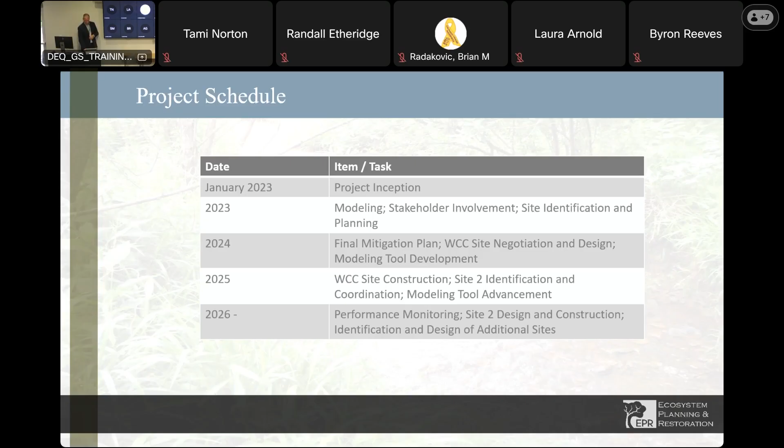So this is a map of the watershed. That red line is the Stoney Creek watershed. You can see it's on the city of Goldsboro there, Wayne County, North Carolina. The upper part of the watershed is still somewhat agricultural, although it's got a lot of development pressure on it, and the lower part of the watershed is the city.

Our first site that we chose to implement is that red star there, kind of right in the middle of the watershed, near Wayne Memorial Drive. You'll hear me talk about that a little bit - that's kind of the main thoroughfare that cuts through the watershed. It's got the hospital, it's got the community college, and it has had flooding problems over the years, and it was specifically cited as a focus area in the legislation that appropriated funding for this project.

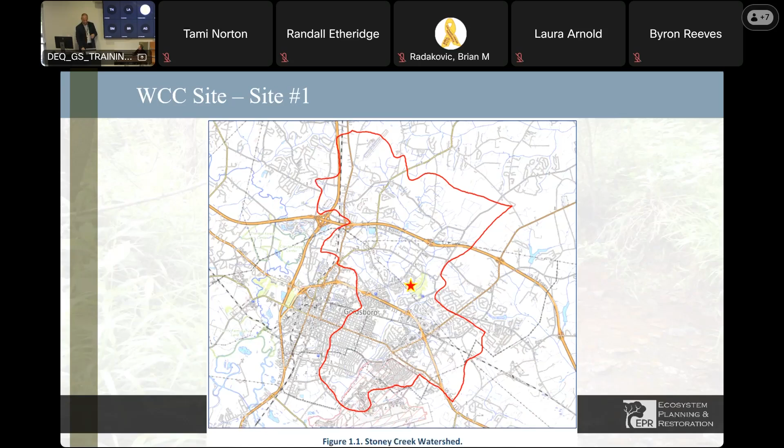Just pulled this graph out of the mitigation plan that we did for the site. This is a stormwater constructed wetland project. I'll show you here in just a second. The whole idea is to capture water that's primarily coming off of the Wayne Community College campus, and take that steep peak, because it's very high impervious surface, knock it off, spread it out, so we retain that water and knock that hydrograph down, so that water going into Reedy Branch and then ultimately into Stoney Creek, hopefully has some impact, benefit downstream on resilience.

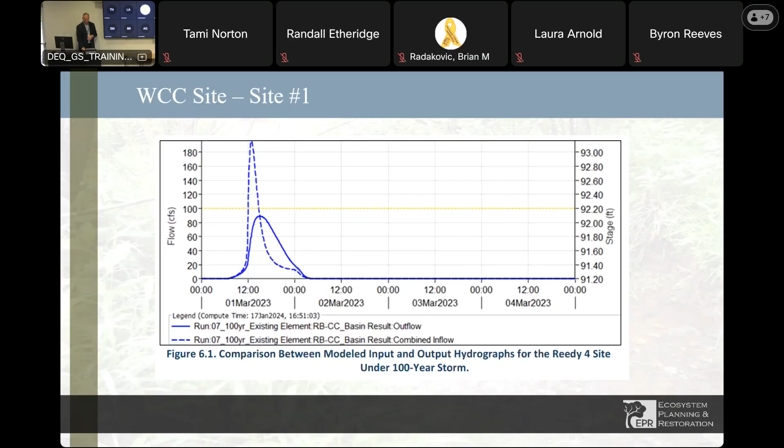Where we are now, earthwork on that structure, that site completed this month. We had a walkthrough with the college last Friday. Everything went great. We've still got planting to do. That'll be done probably the end of November, 1st of December in the dormant season.

We'll start the monitoring setup work probably next week, working on getting that instrumentation. We're going to be monitoring the hydrology of that site. You saw my hydrograph I presented earlier - that was the model prediction of what the site's going to do. We're actually going to implement it with equipment and document what that project is doing, that's our goal. That'll be done for, I think, 5 years is our contract monitoring period. And then we'll have as-built and the baseline monitoring document done in December.

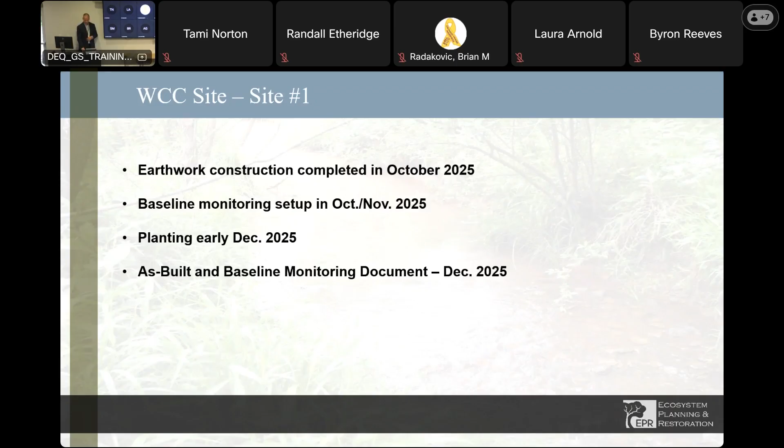Okay, so this is the completed site. I believe it's 9 acres is the catchment area of that stormwater wetland area. You can see the college kind of back there in the upper right.

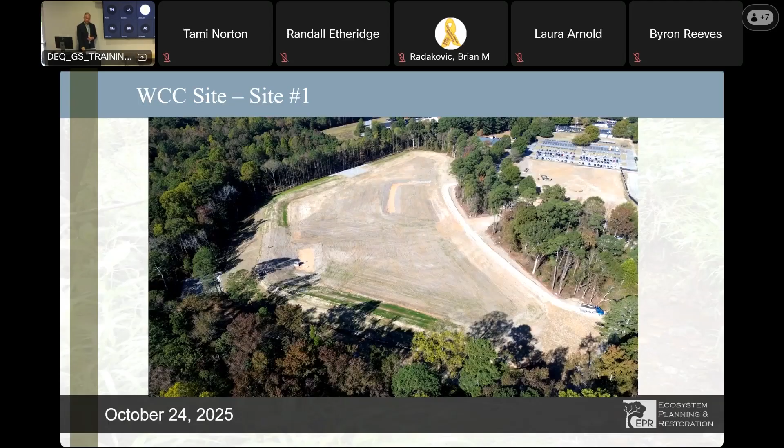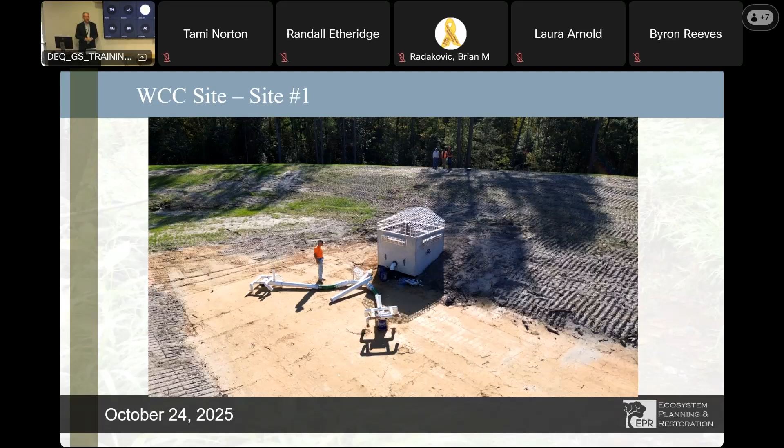That's our primary outlet for the structure, pretty big drop box there with the skimmers that they were attaching on Friday. That will allow water to come into that basin, rise up to the level of the top of that outlet before it starts going out. That'll set the normal high pool, and then those skimmers will draw it down over 2 or 3 days to drop that hydrograph limb that I showed you earlier.

This is looking on the south, southeast side. You can see the embankment of the structure coming around, and behind that in the shadows of the trees, there's a greenway connector. We've got a greenway trail that goes along Reedy Branch, back in the woods, and they've got walking trails on the campus as well. One of the amenities the college really liked about this project, it was going to provide the opportunity to connect those two trails with a greenway connector. So the college is very excited about that, and if you look, you can see that white line back there that they were paving the day we were there on Friday.

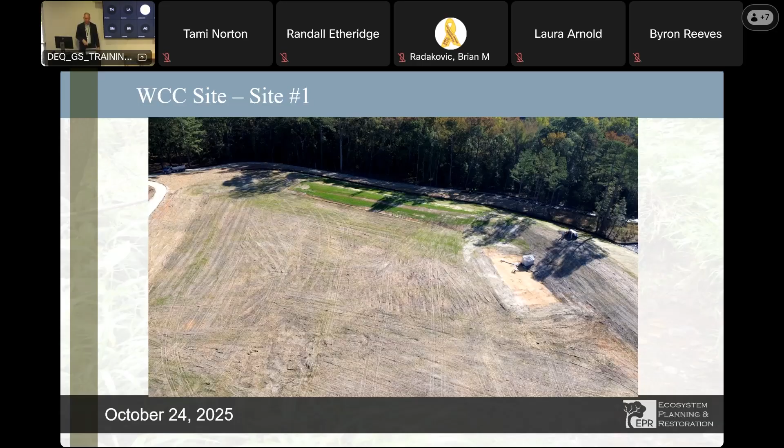In the bottom of that photo, you can see the inlet where the water comes in from the campus. I'll show you a video of that in a minute. It comes into that little stilling basin, fills up, spreads out, and then is controlled by that outlet structure. Curious to see what it looks like after this week.

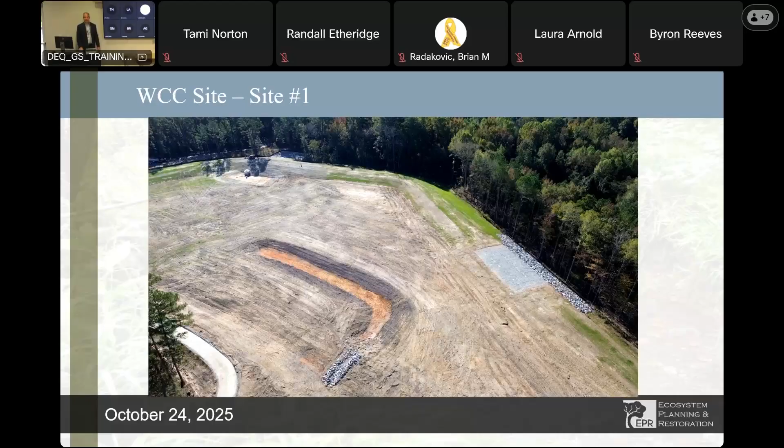Sorry, let me go back one. And then you've got an emergency spillway over there on the right side of that photo. That's some interlocking block that when the water level gets to a certain height, it will release there, like in a big tropical system or something, to keep from breaching over the embankment anywhere else.

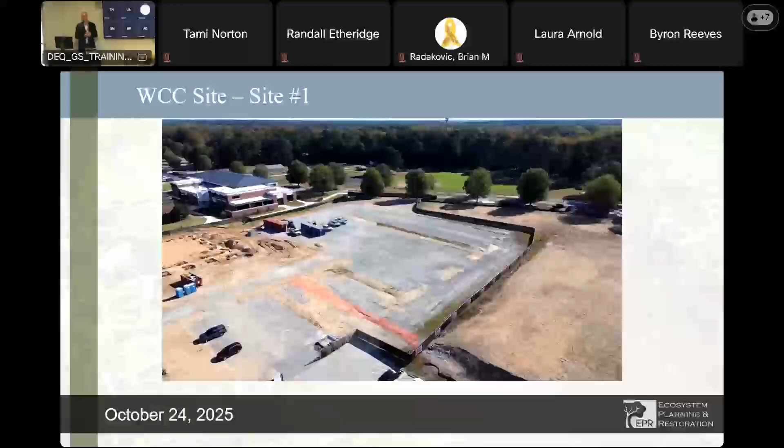See if it's going to work - hey, it works. So that's looking at the college, that's our watershed. That's some current construction going on with some buildings they're adding, additional impervious surface. That area of dirt there is some spoil we brought over from the construction site, and we were able to spoil that on site. You can see the ditch there in the center that drains all of that water to a pipe that goes under the campus drive, and then comes out on the other side into our constructed wetland at that outlet I was showing you earlier.

You can see looking back towards the outlet of the project. So it gives you a good flavor of that. So excited to get that one in the ground. It seemed like a long time coming. There were a lot of pieces to get through with that.

This was the first project done under this pilot project, the first one done for resiliency, so we had to work through things like easement agreements that had to be tailored for this, so that took some going back and forth.

But it's been a good process working with the department. So can I ask you a question? Yeah, sure.

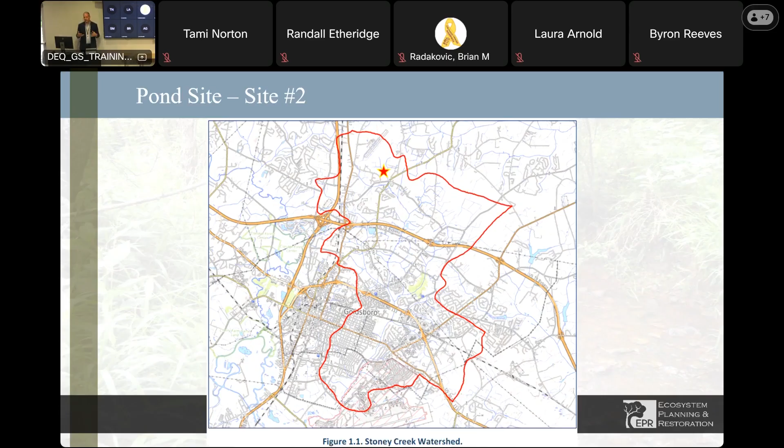Just real quick, the planting you're going to be doing, if I remember correctly, it's going to be some wetland, some not wetland, on the inside perimeter. We don't want to plant the embankment with anything woody. The colleges agreed they're going to maintain that just like you would a dam, because that's essentially what it is. On the interior of the project, we're going to have a combination of herbaceous and woody plantings, mostly wetland plants, but some facultative wetland, obligate wetland, and some up to facultative in the drier areas, because there will be different zones throughout.

Okay, second site is a pond location, an existing pond we identified up in the upper reaches of the watershed, in the headwaters of Stoney. This is a site where we're looking at doing a pond retrofit to increase storage during storm events, and work with the landowners to improve a situation where they're pretty close to a pond breach right now.

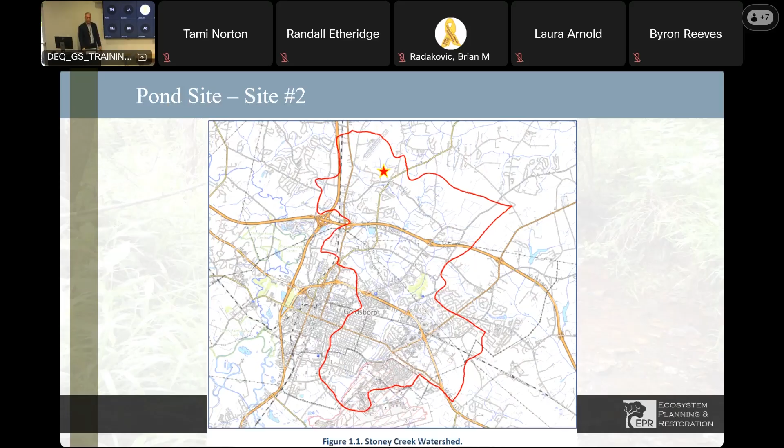So I should say too, with the college, they agreed to do that first site with us, no payment for land or anything like that. There's going to be no payment for land on this site either. That's probably something we'll have to do on some future sites. We've been fortunate with the opportunities we've been given, so we're trying to make that money go as far as possible. But here we've got landowners who will get a benefit out of this because their current pond is about to breach.

Our landowners, we have two primarily. There's one in the upper part too, but they don't really control the dam. All are verbally on board. We've developed preliminary design concepts, done some modeling, and right now we're working with dam safety because the size of the dam could potentially kick us into an intermediate classification, and we're trying to dial things in to hopefully get an exempt status.

If we have to go intermediate, I think we can work with that. We are going to avoid high hazard. I think we've decided, along with DMS, that's probably not where we want to go with these types of projects, at least not with this one. So we're working through that process with dam safety.

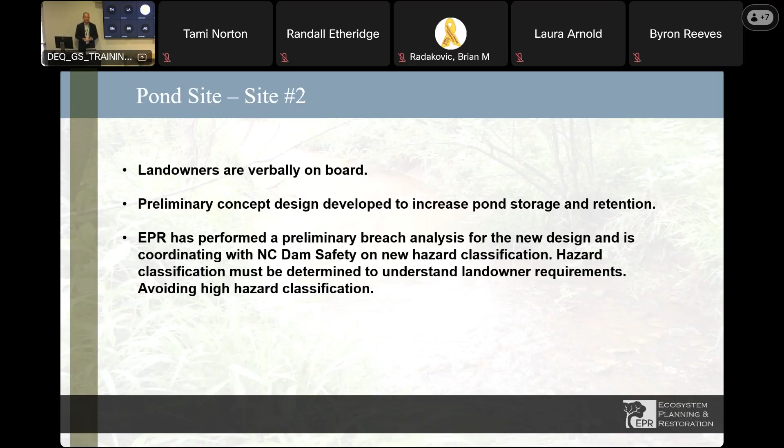Once we understand where we're going to fall, we can communicate any requirements to the landowner, make sure they're on board, get them contracted with agreements, and move forward with the formal design, permit, and implementation of this site.

But probably a few more good storm events and that dam could go. The landowners want to keep that pond. If they're going to keep it, some significant work has to be done. So it opens the opportunity to rebuild that dam correctly at a higher height and allow that pond to have a lot more storage for storm events, holding water higher in the watershed rather than letting it shoot all the way down.

We've got opportunities on the north side to do some excavation for littoral shelves, wetland shelves, that type of thing, which could have water quality benefits as well. That'll help balance some earthwork, so there are good benefits to doing that.

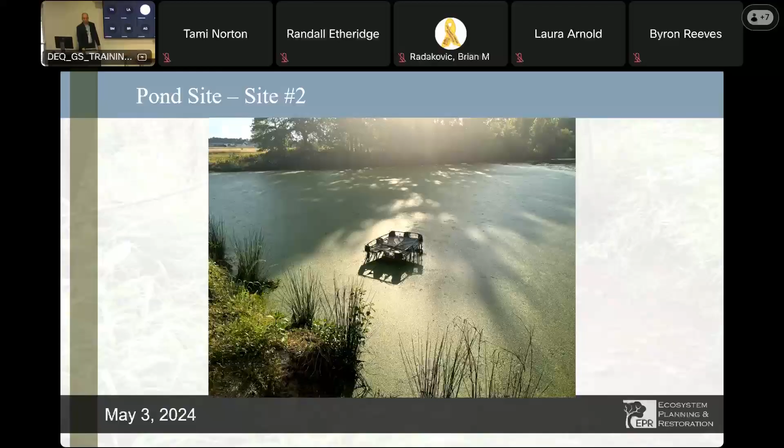Okay, looking forward, we've identified a number of different sites around that have potential for doing additional work. I called these sites headwater sites. So what we focused on so far to date has been projects that are not on jurisdictional streams because of the permitting issues and complications that are going to arise from that.

Going into where we are now, into the next phase of the project, we have some ideas that we're working through of how maybe we could work on jurisdictional streams and work on larger systems, get more retention, get more bang for the buck.

Because what we're seeing is when you're working on these smaller projects up higher in the watershed, once you get down the watershed, the effects are getting drowned out. You're really not getting a whole lot of improvement as you get further and further away from those practices. So we're trying to look at ways we can get bigger bang for the buck.

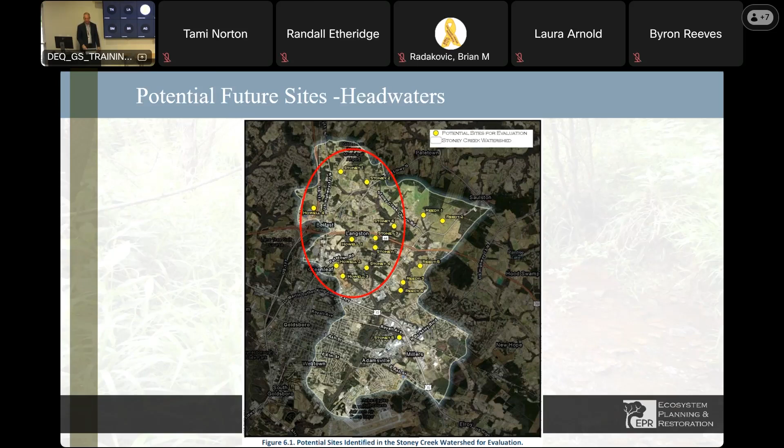This is one concept we're looking at. Without going too deep down a rabbit hole here, Stoney Creek has some interesting topography. So these main stream channels, the larger main stems, have very distinct, very deep valleys. So your agriculture, your development is up on the high terraces, and then they drop down steeply into these floodplains of these creeks, which by and large are wetlands and woody and in pretty good condition.

But it opens up an opportunity there if we can provide retention in those valleys and keep that retention from affecting development, existing structures, future structures, agriculture, that type of thing. Seems like there's a big opportunity there to provide that retention and resilience in those areas if we can figure out some of the technical complications to that.

So one concept we're looking at with modeling is basically think of a road crossing without the road. So building an embankment across that valley, that floodplain, to capture that water, and then have a structure at the bottom that at base flow allows free flow through. So you don't get aquatic organisms that are blocked from moving upstream.

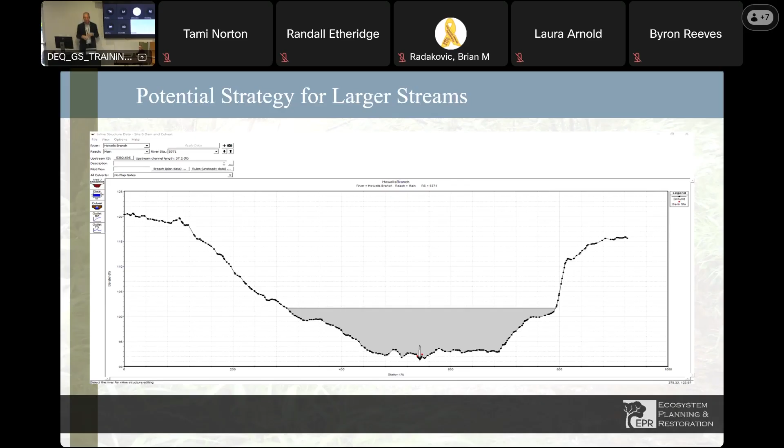You don't get some of those permitting concerns that you have with a reservoir. You would have the impact of that embankment, but ideally the impacts up and downstream would be minimal, if not nonexistent. So that's the concept, a 3D kind of visualization of that we're working on.

Again, running these models to kind of see, okay, how could we do this? Number one, would it be effective? How effective? And number two, how the heck are we going to design that so that it doesn't blow out in the first big storm and is going to be sustainable?

I'm sorry, that white thing, is that actually supposed to be the stream? No, sorry. That's the embankment that's built. Okay, I'm sorry, it was hard to tell. The purple lines there are showing your contours. So the valley is kind of running diagonally across there, that flat area.

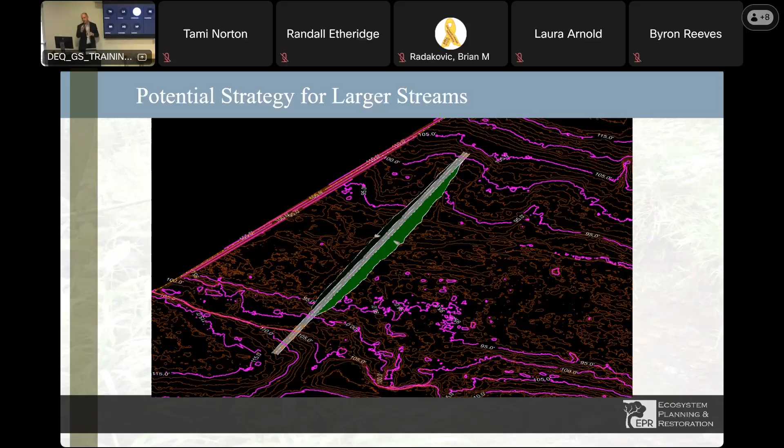Right, and then that's showing that embankment built across there with that little pipe kind of in the middle there that would be on the stream channel. So it's actually not showing. Oh, I see, okay. Yeah, it's quick and dirty. No, that makes sense, thank you.

So we've run a little bit of modeling on that, as I've indicated already. This was a potential location where the topography seemed to lend itself to being able to do that. So this is all conceptual. This is not any kind of agreements or discussion with landowners at this point. This is just looking at technically how would this work and what would the effect be.

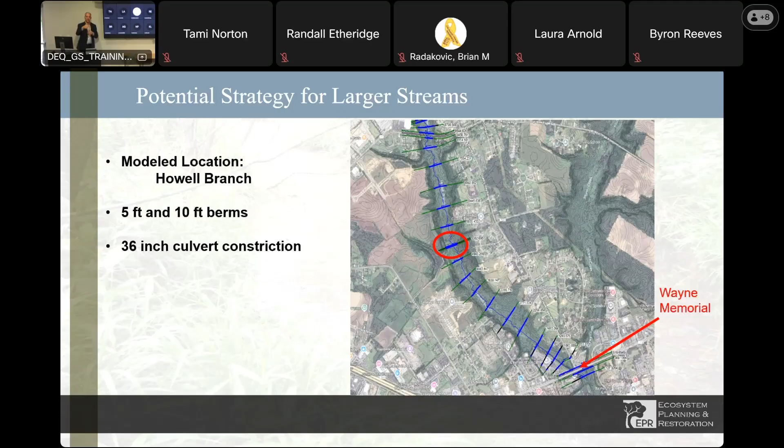So you can see Wayne Memorial Drive down there in the bottom of the slide. If we went maybe a mile upstream or so of that and did that, we looked at different berm heights, different outlet configurations, and what we've kind of seen initially is we can get some pretty good reductions in the smaller size storms.

As we go up to a bigger berm there on the right, a 10-foot type structure embankment, we're getting reductions at Wayne Memorial of more than a foot, up to the 10-year storm, and then that drops off.

Again, we haven't dialed in these numbers yet, but just looking initially at how effective a structure like this might be as compared to doing these more headwater sites that are further removed, and having to do maybe many of those sites to get the same type of effect downstream.

It says peak shifting like this, if it happens at a watershed scale, can have unintended consequences. Have you given thought to the longer period water will sit on non-participating properties downstream of these projects? I think he's thinking about hydrologic trespass, ish. Have we thought about it so far? The answer is probably no, because we're at this conceptual level, but will we have to think about that with any kind of modeling or specific implementation?

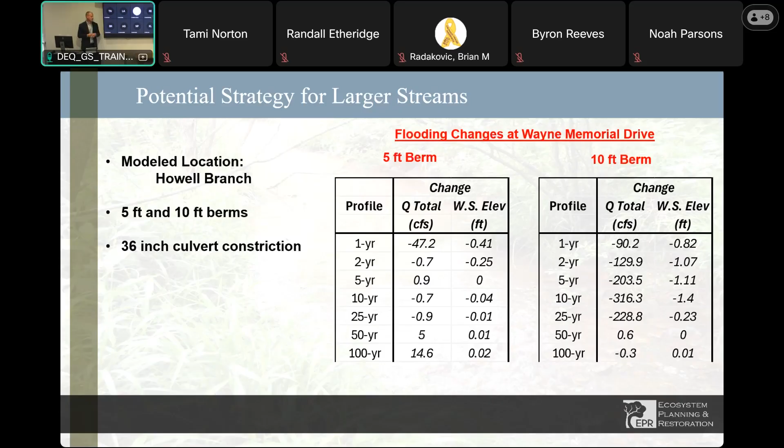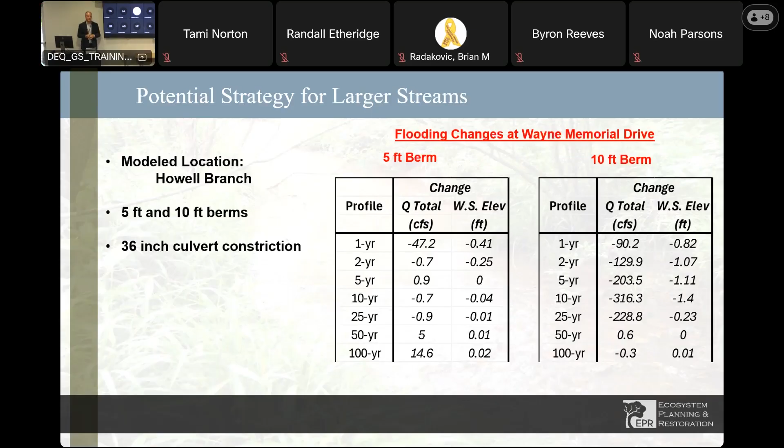So can we come up with some tools that allow us to make these type of evaluations at a preliminary level quicker and easier and prioritize things better without having to do a lot of this modeling work that we basically spent a year or two doing. I'll be a lead in on that.

Yeah, is this the end? That's the end. Oh, good. Oh, here's Tami.

So I think you might have to unplug. Yes, probably do. And then Tami should be able to share. So just real quick before Tami starts, as she's getting her stuff together,

Tami and I especially have been working a lot to not only look at these models, and of course she's been doing the modeling, but to talk about all the implications, what it means, all those kind of things. And where this actually started was because we are going to be using possibly traditional mitigation practices for flood mitigation, those kind of projects, as in wetland, stream, basically nature-based solutions.

We, as DMS, needed to understand what kind of effect those projects currently have on flooding. We needed that information so that when we do start tracking our progress and our storage, and when we start looking at proposals and comparing them, we have some idea. So we, of course, approached EPR, and we asked them to do that.

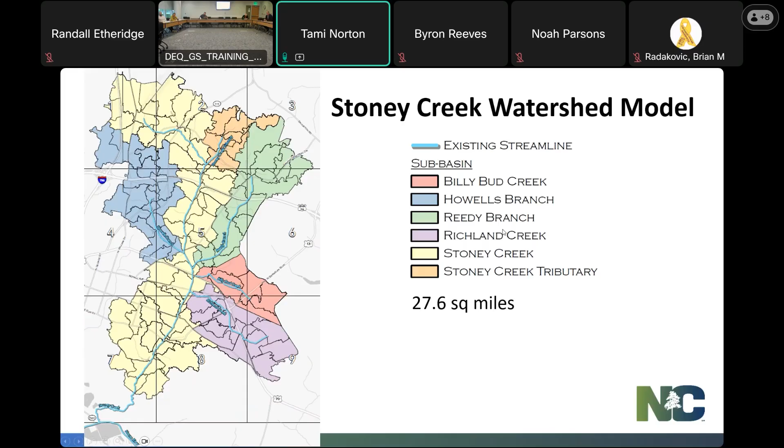Okay. So just a reminder about the Stoney Creek Watershed Model. It's about 28 square miles. There are several sub-watersheds within it, and we did some nature-based solution testing and modeling within the Reedy Branch sub-watershed, which is the green area on the screen. Some of the NBS practice types that we looked at included 3 types of stream restoration, riparian wetland restoration, constructed wetland with various runoff volume captures that we were targeting, and then buffer restoration.

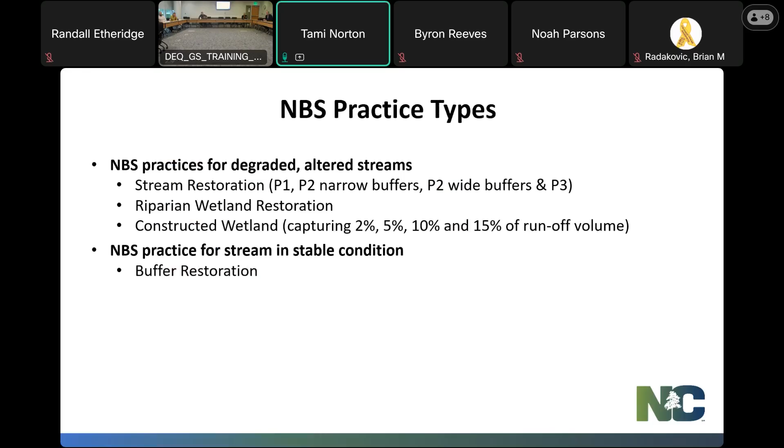And from that modeling, we realized that there was a relationship between the practice area footprint of a project that you were going to implement and the drainage area coming in. This relationship popped out for each of these different types of practices. And from that, we thought, is there a way that we can develop a tool to predict peak flow reduction, which can be translated to a water surface elevation reduction, without doing the detailed modeling, just like Kevin was talking about, for every single site that we want to evaluate.

And so from that previous modeling, we came up with a site-specific tool where you could look at the individual site, see what could be fit in that site, and then look at the percent reduction in peak flow at the outlet of that site, as well as a location downstream of interest: if we put the practice here, what does it do to the flooding downstream at this location?

And then using basically the same equations, we also came up with a preliminary tool to estimate, if we have a target site, for instance Wayne Memorial Drive, and we want to reduce the water surface elevation at that location by half a foot, what kind of peak flow reduction is needed to hit that target? And can we back into how much nature-based solution practice is going to be required upstream of it in order to hit those targets? And so that's where we were. I presented on those preliminary tools last time.

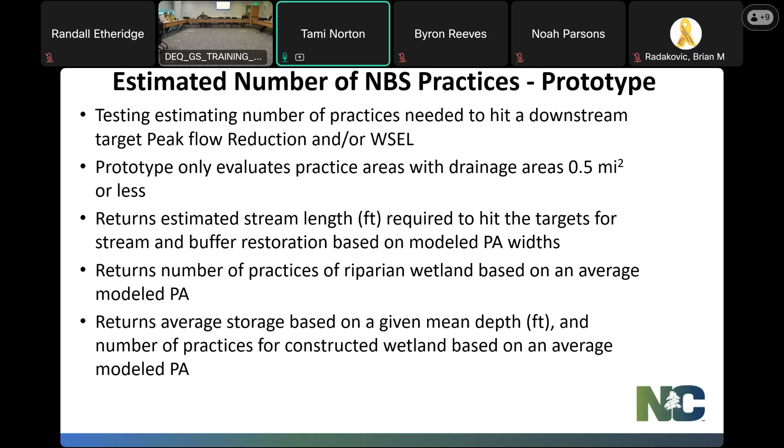I think I showed some of these at our presentation at the conference, something similar to this. Essentially, a couple of things you need to run this part of the tool: you need to know the drainage area where you're going to put a project—the maximum drainage area of the practice site. In this case, I put in a half a square mile, that's the max. You also need to know the drainage area of the site downstream of your practice. In this case, this site has a drainage area downstream of the practice of 4 square miles.

It runs through the equations to spit out the total number of acres required of each kind of NBS practice for the targets you selected at that downstream site. In this case, we're looking at a reduction of half a foot through 1.25 feet. So what does that mean? To get this half a foot reduction, we need a reduction of 22.5% in peak flow at this site. Backing into it, that means we need to take the 100-year flow down to about a 52-year flow to get a half a foot reduction. For a target, what volume do we need to capture to get that reduction? That's what these numbers mean.

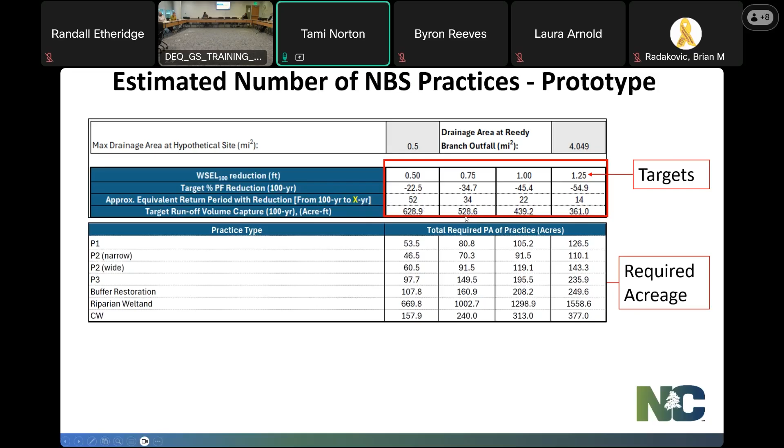There's some upfront hydraulics and estimating you need to do at your site. I used existing HEC-RAS models at the location to determine and estimate these numbers.

The second thing it does is not only give you the footprint acreage you would need, but it also lets you play with the dimensions of your practice footprint. You can adjust the width of the stream restoration and buffer restoration footprints, and it will tell you—if you have a 200-foot wide corridor, you'll need approximately 11,643 linear feet of priority 1 stream restoration to hit a half a foot reduction in water surface elevation at the downstream target location.

For riparian wetland, you plug in an acreage and it spits out how many practices of that size you would need to hit these targets. In this case, I plugged in 43 acres, and we would need 16 sites of 43-acre riparian wetlands to hit this half a foot target.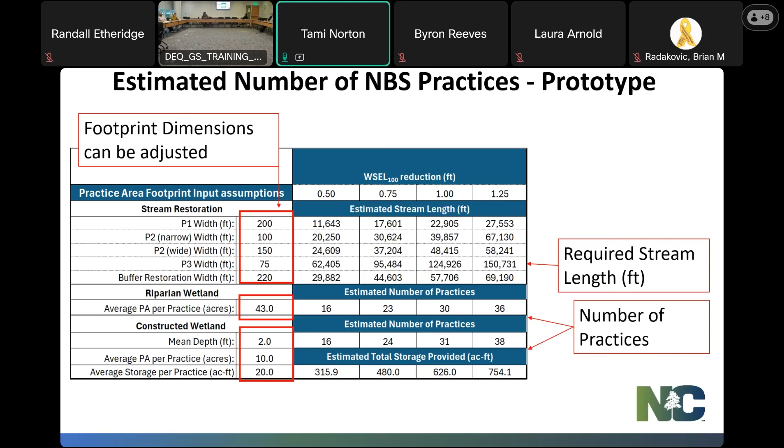Same thing for constructed wetlands—you can adjust the depth and the average footprint in acres of your site, and it estimates the storage and how many practices of that size would be required to hit these targets. So that's where we were when I last presented, this level of sophistication in the tool.

Since then, we've been looking at how we can consider multiple types, not just one, and whether our tool predicts well enough for planning purposes to use instead of modeling all the different scenarios we might want to look at. So we completed additional modeling to evaluate whether the trends are linear or not, and we did multiple practice combinations and compared those with the tool predictions.

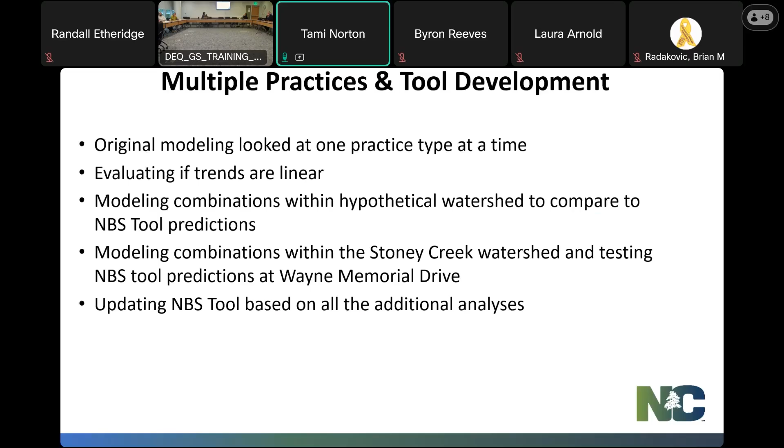We did a couple of different variations of modeling: some in our hypothetical Reedy Branch watershed, but also some in the Stoney Creek real watershed, to see how well the tool predicted outside of the hypothetical situation.

I just want to show you what I mean by that. Reedy Branch was our hypothetical NBS watershed where we did all of our modeling. We wanted to see, okay, what if we did a couple of different practices in a couple of different subbasins? Will our tool predict well compared to the model?

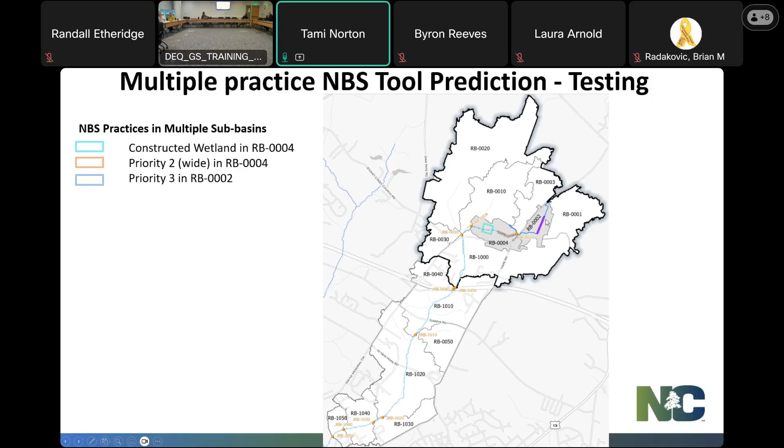So we modeled, in this case, a constructed wetland here, a priority 2 stream restoration here, and then a priority 3 further up in the watershed here. This is a graphical representation of the results. Some people like graphs, some people like tables, so I have a table for table people.

For priority 3, which was the first practice, the most upstream practice, the tool predicted a reduction in peak flow of 7.9%, whereas the model actually predicted a larger reduction than the tool. Further down in the watershed, we have the constructed wetland in priority 2, and the tool predicted about 14%, and the modeling predicted about 12. So they're pretty close.

As you move downstream from the practices, we're looking at the different junctions in the model to see, at this location, how well the tool is predicting versus the model. And it did pretty good in the hypothetical watershed.

If you want to see this, this is the same data but in a table format. Here we are upstream in the most upstream subbasin where our priority 3 was located. The tool predicted a 7.1 CFS change, which is equivalent to about an 8% reduction, versus the model predicted 30 CFS and 34%. So there was quite a difference, the tool under predicted for priority 3 at this location.

But as you move down and look at when we bring in the constructed wetland and the priority 2, along with the priority 3, we start getting these numbers converging and not being as different. The tool actually predicted really well compared to the modeling from that point down.

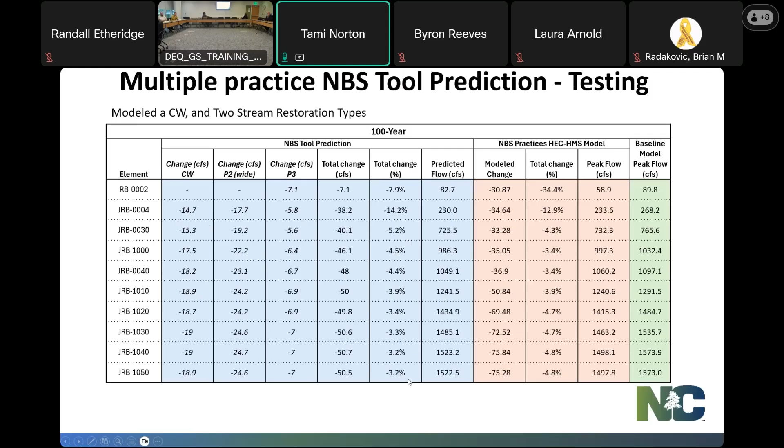So that's great. Let's see how it does in the Stoney Creek watershed itself. What we did is we modeled a priority 3 in... sorry, I don't know why that's showing, I don't know if y'all can see that. I'm trying to get rid of this. I don't know what that is.

We modeled a priority 3 up in the Howells Branch subwatershed here. Just for reference, Wayne Memorial Drive is right here. So we put in a priority 3 project here. We put in a priority 2 stream restoration further upstream in the Stoney Creek watershed. And then we modeled a constructed wetland down a little bit closer to Wayne Memorial Drive in this subbasin here.

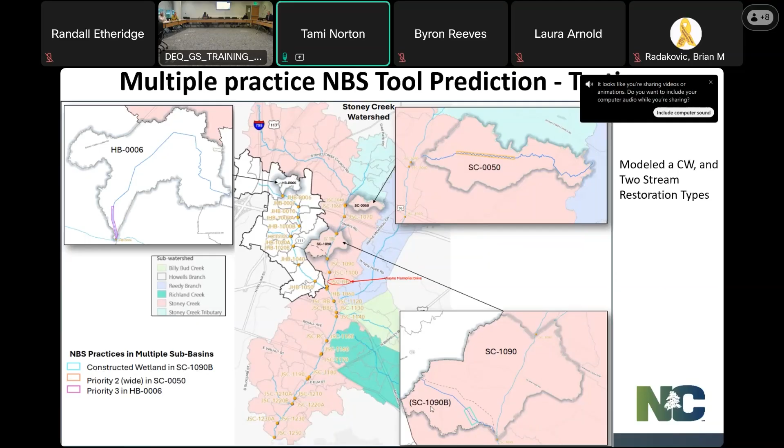And those results are here. So the priority 3, again, under predicted compared to the model way up in the upper watershed of Howells Branch. But I want you to just note the magnitude of flows that we're talking about as well, and then when we get to the table, you'll see that even better.

As you move downstream, the numbers aren't as different, they're pretty close in terms of statistical predicting between the tool and the HMS model. And then here's our priority 2 - it over predicted compared to the modeling in this case. And then the constructed wetland was pretty right on with its prediction with the tool versus the model.

And then here's Wayne Memorial Drive, and our tool, adding up all of the reduction benefits from all 3 of these, is predicting basically no change at Wayne Memorial, but negative 2.6. And then the actual HMS model shows a slight increase, but for modeling, it's basically 0. And that trend is the same all the way down the basin to the outlet.

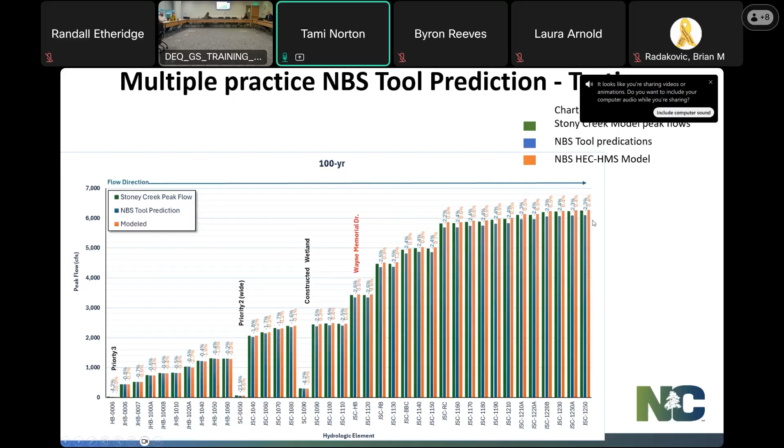So going to the table version of the results, it's showing the same thing. Up here where the priority 3 is located, our existing flow for Stoney Creek is only 26 CFS to begin with. So the tool predicted a 1 CFS change, whereas the model predicted 3. So 4.2 versus 10.9 isn't as far off as it sounds when you have magnitudes this low of flow.

Anyway, you can read, maybe you can't, maybe you can read some of these values as you go on down. This is where the priority 2, the tool predicted a 17 CFS reduction, whereas the model only predicted 6. Again, the flow at that location was only 72 CFS to begin with.

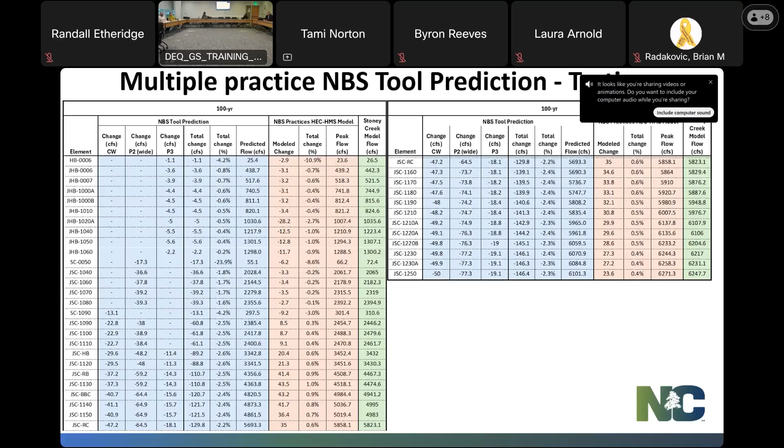And that is where we're at so far. We are getting ready to start some more. We feel like we need to do a lot more testing before we say yes, our tool's great, or it's not great. So what we're getting ready to do is some more modeling within Stony Creek watershed. We're going to look at 30 sites that will include multiple practice types, model them, see what our tool is predicting, and then assess whether it's predicting well, and if not, whether there's anything we can do to improve the tool.

And then one other thing that we're going to do is look at a site outside of Stony Creek watershed and do basically the same thing: model a practice type and use the tool to predict what it would be versus the actual modeling results, to see how well it does outside of Stony Creek. One of the assumptions is that we're going to pick a watershed that is similar to Stony Creek in terms of hydrogeography. We wouldn't want to try to use this in a mountainous situation, for instance. I don't think these values would do well at all there. So that is where we are to date.

That is all I have. So if anybody has any questions... I still don't know how to get rid of that, so I'm just going to leave it. And I cannot see if anybody has questions.

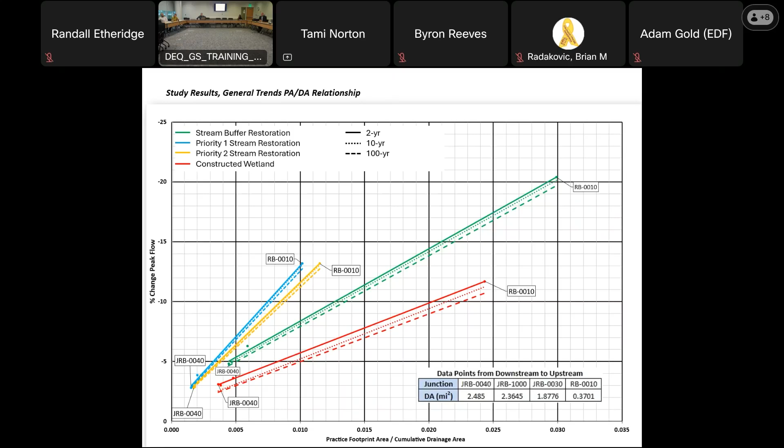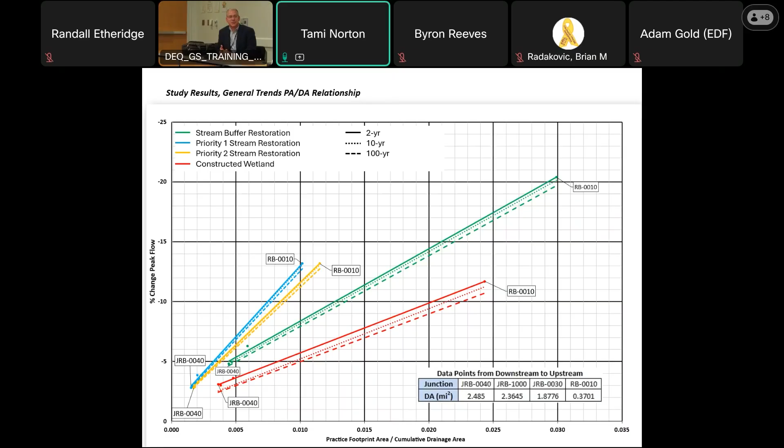I think one thing that's probably evident to everybody on this call, but one obvious conclusion out of all of this is we're not going to undo 200 years of land development with one or two practices going into a watershed. I think that's quite obvious, but what we're trying to do now is quantify what that looks like if we do want to undo some amount of that harm, reduce that flooding. And then we could go down a rabbit hole with the continued development that's going on in a lot of these watersheds too.

Yeah, that's a really good point. I think that was one of the things, even before everything started, we were all having those conversations. And that was one of the goals of the modeling, at least for the program, was to set up realistic expectations. I think that's what this is giving us.

I think another conclusion is there's no magic bullet. There's a lot of tools in the toolbox, and it's going to take a lot of those tools being implemented, along with some things that were not in the scope of our project, like infrastructure improvements and stormwater ordinance changes, or rule changes. Yes, absolutely.

Any more questions before we move on to Celso? All good? Okay, thank you, Tami. No worries, thanks. Yeah, apparently you can just do what you need. Yep, you know what you're doing. I hope so. Let's see.

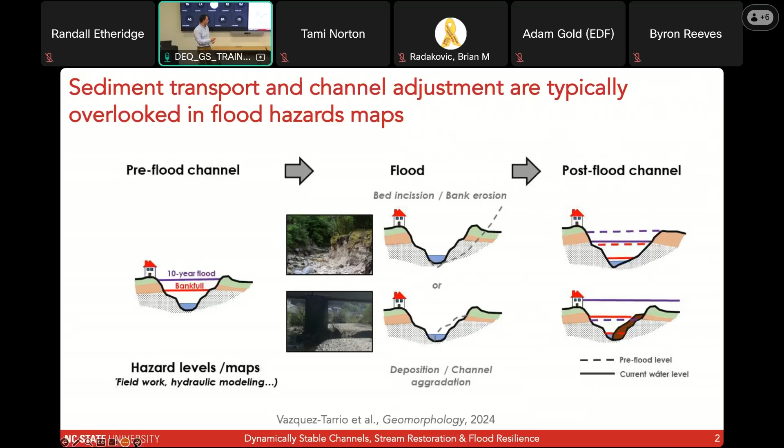So basically it will change how much water and how much sediment a particular river can move under a particular circumstance. So with this in mind, what we set up with this project is to address two specific challenges.

The first challenge is how to make restoration more resilient against floods. And then the second challenge is how to implement river restoration in a future that is unlike the past.

Here are two pictures. The one on the top is the same Swannanoa River, but upstream close to Swannanoa. And this river looks at this location completely different to how it looks close to Asheville.

We were on the tour with Rankin, who's actually doing consulting work for NCDOT, and we all agree that this is what at least a resilient system should look like when moving and transporting sediment. The picture on the bottom is actually from Cross Creek at Fayetteville during Tropical Storm Debby.

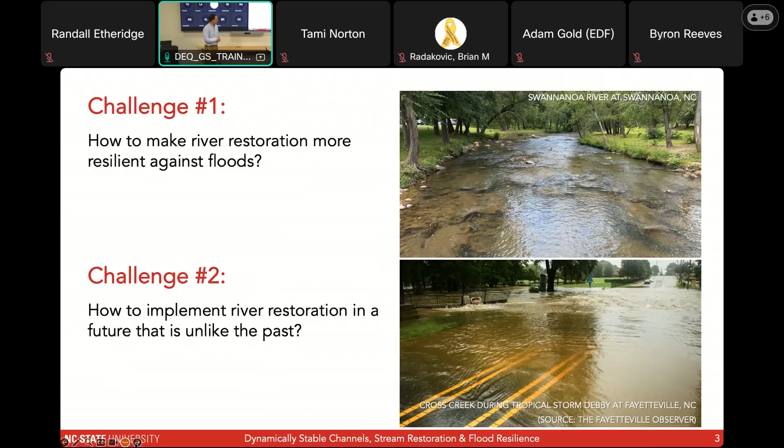We're reaching out to the city of Fayetteville, and I'm going to put Byron on the spot. I reached out to him because we're trying to also target one of the sites close to the coastal plains.

I'll walk you through the two challenges very quickly to highlight a little bit more the motivation of what we're doing, and then I'll move on into what we're specifically doing in this project.

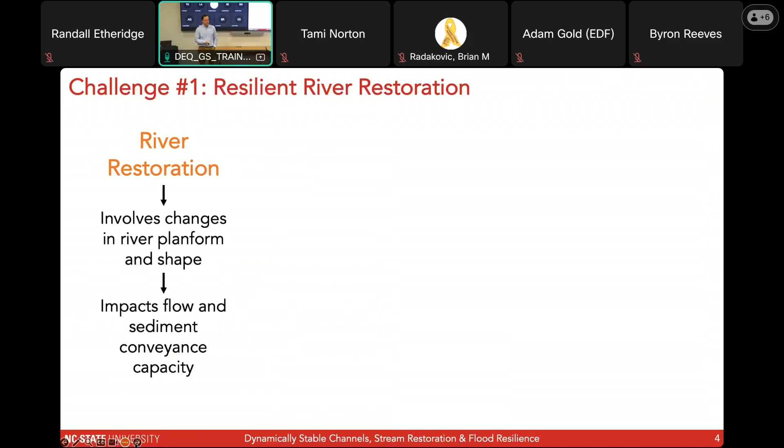As all of you in this room know, river restoration involves changes in river planform shape. That means you are going to have impacts on the sediment transport capacity and the flow conveyance capacity. So you will undoubtedly affect how much sediment and how much water can be moved.

I'm going to show you the case of Richland Creek in Wake Forest, North Carolina. I'm not going to go into the specifics of the restoration design, but this is part of that first interaction that I had with DMS and Perian back in 2018. We started working together.

Beyond the specifics of what we're looking at in this project, what I want you to know is that we had the opportunity to measure two different geometries, and we also had the design.

So we have an opportunity to evaluate the impact of a large event that happened between what we call the post-restoration geometry, about 8 years after the restoration began, and then what we call a post-hurricane geometry 3 months afterwards, after Hurricanes Florence and Michael.

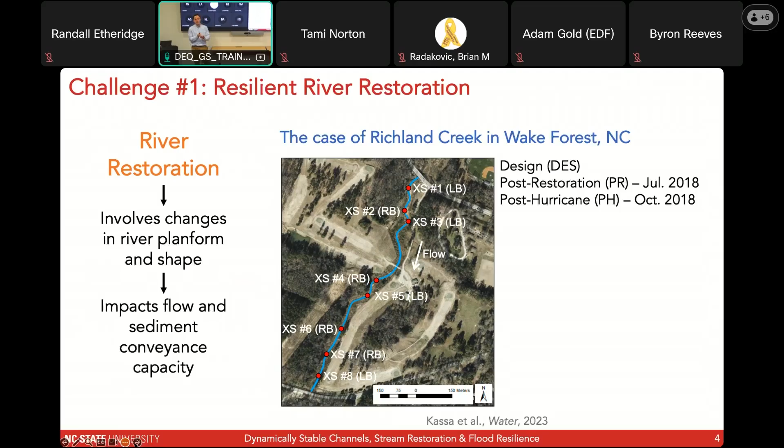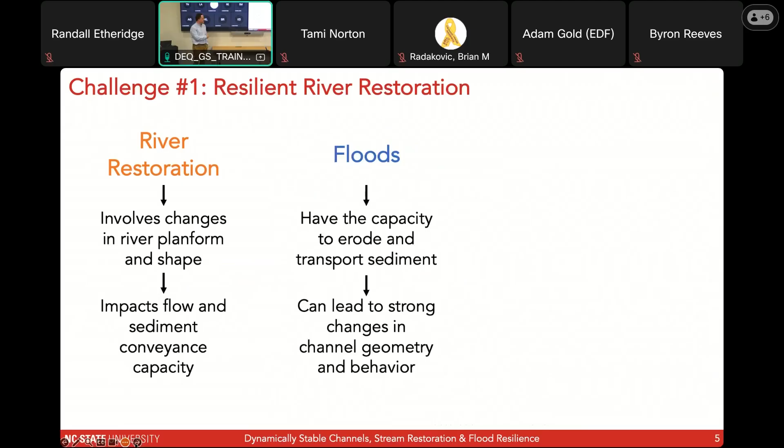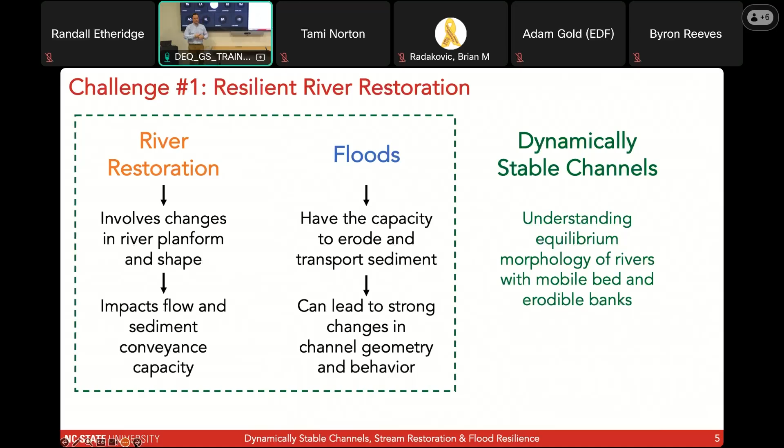So as I illustrate with this example, floods have the capacity to erode sediment and transport sediment, and then can lead to strong changes in channel geometry and behavior. And what we want to do is take these 2 factors into account and then tap into a topic that is old in geomorphology, which is the topic of dynamically stable channels. So it's basically understanding what is that equilibrium shape of a river that is actually actively transporting sediment and that can erode the banks, which is what we see in reality, moving beyond these concepts of threshold channels or channels that will not move under any conditions.

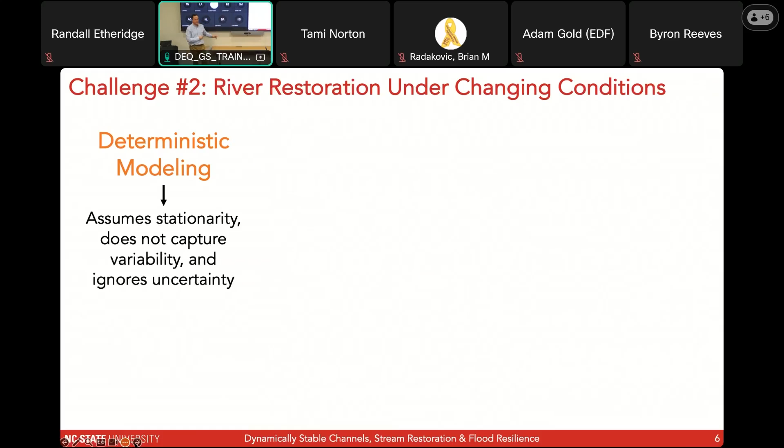All right, and then the second challenge is river restoration under changing conditions. Right? So how do we account for the variability that we expect to see in the future? So typically we apply deterministic models, and what I'm referring to is just the fact that we tend to do modeling in the sense that we have one input, one output, and then that's the value that we take for assessment or for design. And what happens with deterministic modeling is that it typically assumes stationarity, and it tends not to capture the variability and the uncertainty of future events.

And for that, I'm going to show you the case of riverbank erodibility parameters, also building on that work that we pursue with Brian since we started and collaborated. And what you see on the screen is the only equation that I have in the presentation, but this is the excess shear stress equation, and it's what models like BSTEM from USDA and HEC-RAS use for predicting bank erosion. And what the equation does is basically calculate a difference between the applied force and the resisting force, and then based on that, it calculates an erosion rate over a given time.

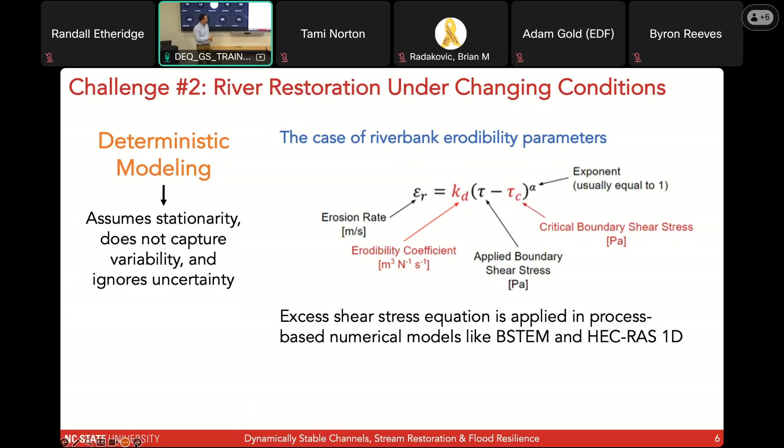And in particular, I want you to focus on the 2 red parameters, the critical boundary shear stress to your right. That's the maximum force that we can have in the channel before erosion starts. And then the erodibility coefficient is most related to the rate. So once sediments start moving, then how fast it will move as the flow continues to increase.

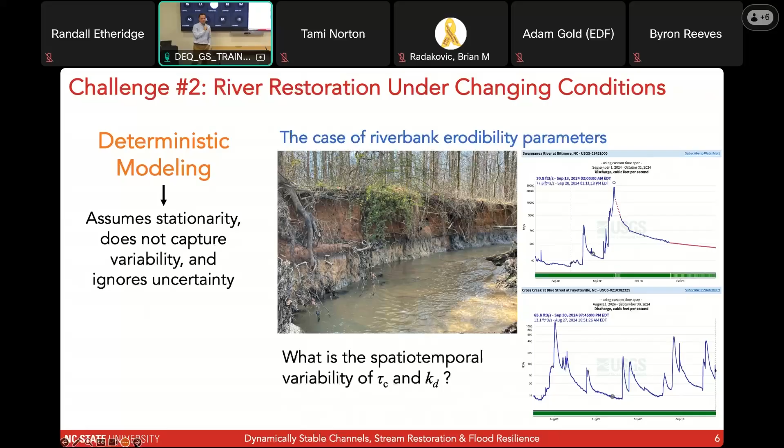So if you have a long dry period and then you have a big storm, the bank will behave differently than if you have subsequent events that may not be a tropical storm Helene level, but you may have significant erosion just driven by small events that happen very frequently. And this is something that right now we are not able to account for in mainstream models.

So the argument here is that we need non-deterministic modeling, and by this what I mean is that we need predictions that are probabilistic, so talking about exceedance rates or probabilities of exceedance. And for that, we're focusing on a performance-based approach. And the idea here is not that we are developing a new model, but it's how we're using current models that work into understanding how we can treat rivers as dynamic entities. So under all possible considerations, what will be the probability of observing a particular event?

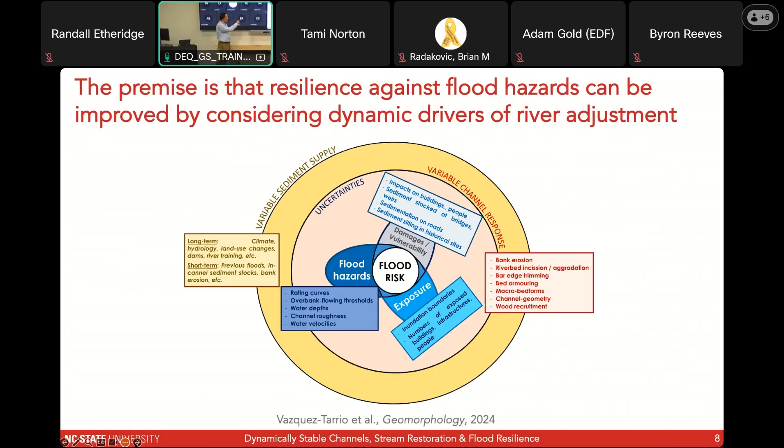So with that in mind, the premise of this work is that resiliency against flood hazards can actually be improved by considering a dynamic adjustment of river channels. And this is a figure from the same paper that I mentioned. And you can see here that there are many things that we are not accounting for in this project, but there are many things that we are, right? Especially related with sediment. And you can see long-term drivers like climate, hydrology and land use transformation, but you can also see some of the short-term factors that we discussed, such as previous flood, in-channel sediment, or bank erosion, among others.

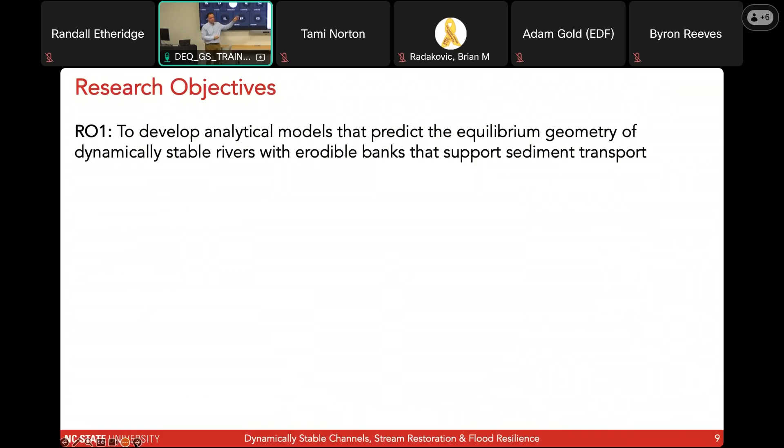So with that, we're going to be pursuing 3 research objectives over the next 3 years. The first one is the more theoretically based objective, which is to develop analytical models for the equilibrium shape of channels that can move sediment and that can erode their banks. The second one is to determine the impact of varying water discharges and sediment loads on that trajectory of adjustment. So what is that interaction between material and water flow? And then the third one will be to incorporate these two into a performance-based approach that can help us to quantify flood risk in a probabilistic sense.

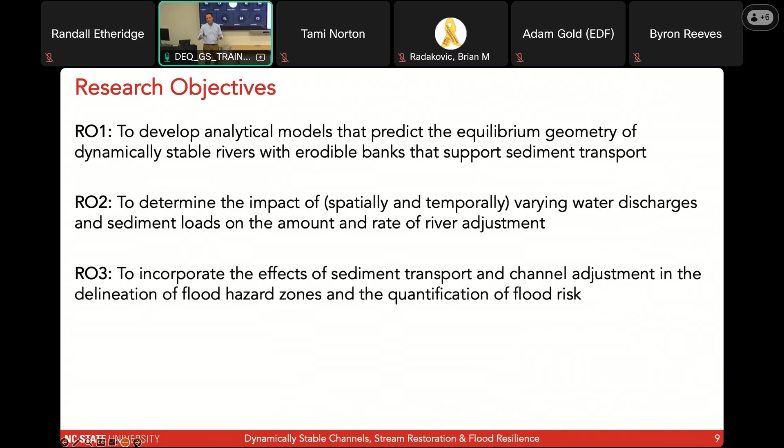So I'm going to walk you very briefly through the motivation behind the 3 research questions, and then I'll conclude with how these 3 things are connected, at least in our minds now, and then when you invite me back again, I'll show you how they are connected in reality, and then see how far off I was.

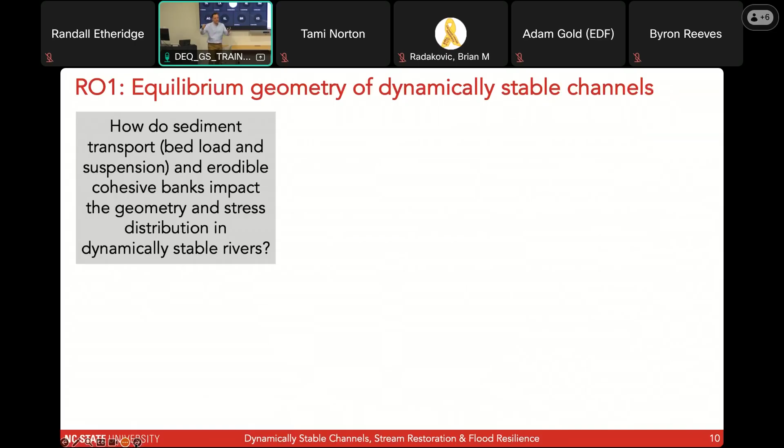So research objective 1, again, has to do with the equilibrium geometry of dynamically stable channels. And again, this is a problem that is old in geomorphology, but we are interested in knowing what a channel will look like depending on the flow regime that is coming into the channel and depending on the material that you have. So whether you have sand or gravel and so forth. So we're interested in understanding all of these different movements that are basically controlling the rate of channel adjustment and the rate of applied force.

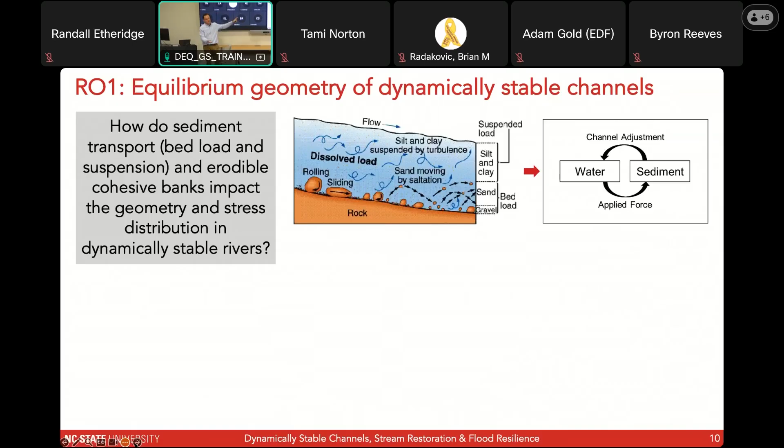You can find sand on the floodplains, and even under those very low conditions, sand was still moving, and you have bedforms that are basically controlling the roughness, right? And the idea here is to highlight that, as Priya mentioned at the beginning, sand will always be moving. So trying to get to the geometry of dynamic channels without considering sediment movement is actually a problem for some of these systems. And then how these interactions are extrapolated when you have more important flow events will control how these channels will continually adjust.

So the idea is that with this research objective in particular, we're going to arrive at design equations that account for these dynamic factors, right? So this will be, in theory, how the channel should look if the channel is made out of certain materials under a certain flow rate.

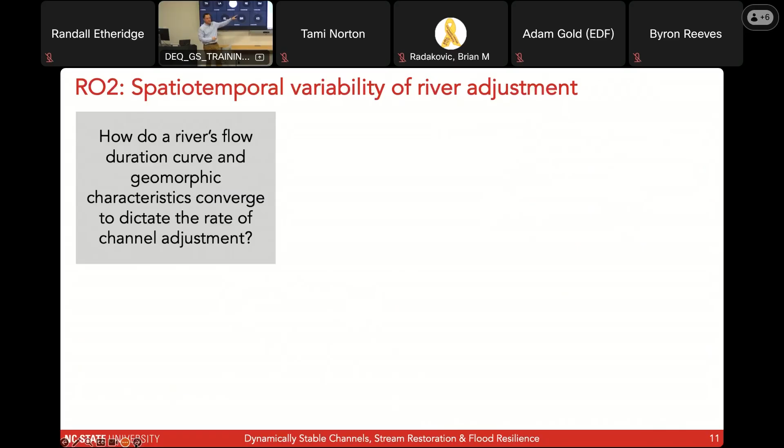The second objective, and this is more a numerical and field work oriented objective, is to look at the spatiotemporal variability of river adjustment. And here, basically, what we want to understand is what happens if you have different characteristics of river channels, right? And here I'm showing you 3 examples from different projects.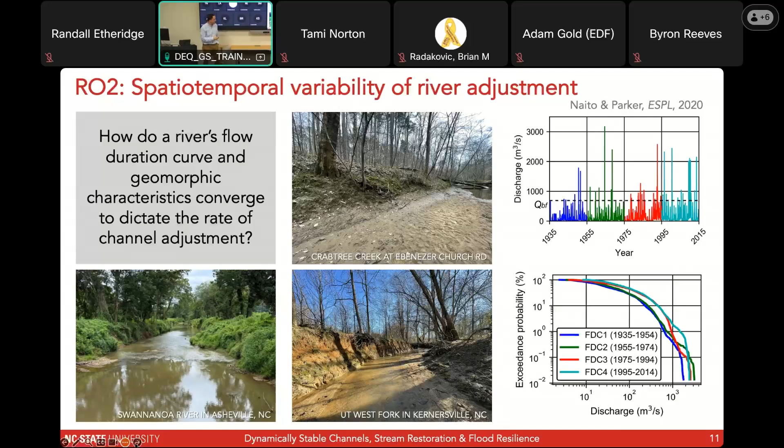And then you combine this with the flow duration curve, and this is just a representation of the time that a particular flow spends in the channel. The 2 figures that I have right here are from a paper that was published in 2020, and this is the Minnesota River. The reason why they are able to do this is because they have a long record of flow discharges in the Minnesota. But what I want you to see on the bottom right corner is how the probability of exceedance has changed over time, right? So flows that are larger are much more frequent now, or they have a higher probability of being exceeded in a particular year, as we have seen even here in this area recently.

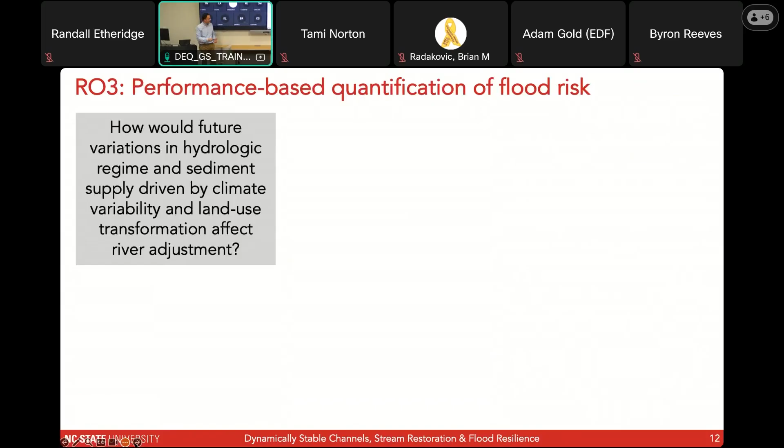So for the third objective, the idea is to take the theoretical approach for the design equations, combine that with what is actually happening in the field at the sites that we select, and then use different scenarios that consider variability in climate and land use transformation, for example, sediment supply, and then understand what will be the most likely trajectory of the river if this were to happen, right?

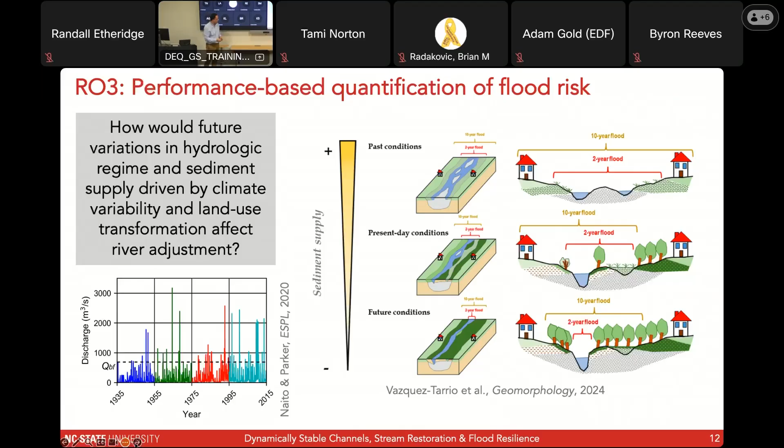We talk about the Swannanoa. Helene was an event that was significant, that primarily caused that river to widen and to move plenty of sediment. And that river will have, because of that event, a different trajectory of adjustment than I would expect to happen, for example, in the coast or in Crabtree or in any other river that we have worked on. So this is more about looking forward in the future.

So coming back to the 3 questions, what we expect to achieve at the end is to combine design equations that can be used separately for stream restoration with river adjustment duration curves that basically allow you, similar to what we do with bank erosion, to understand what will be the trajectory of adjustment of this particular river, given these conditions in the flow and this material. And then those 2 objectives will contribute towards more of the probabilistic approach. Like if we set a series of scenarios inside this probabilistic engine, then what is the probability of exceedance of certain events in the future?

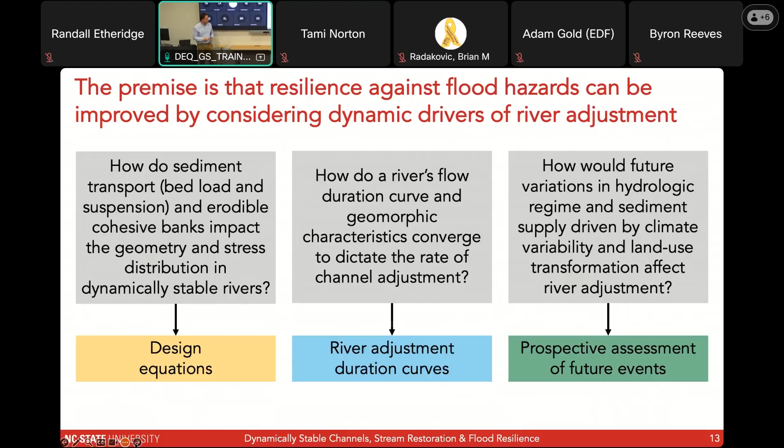And this is a section where the banks are vegetated. You could see a little bit of erosion in the toes. And then it was paved with sand, but we do not expect that to be the case once we determine the material underneath.

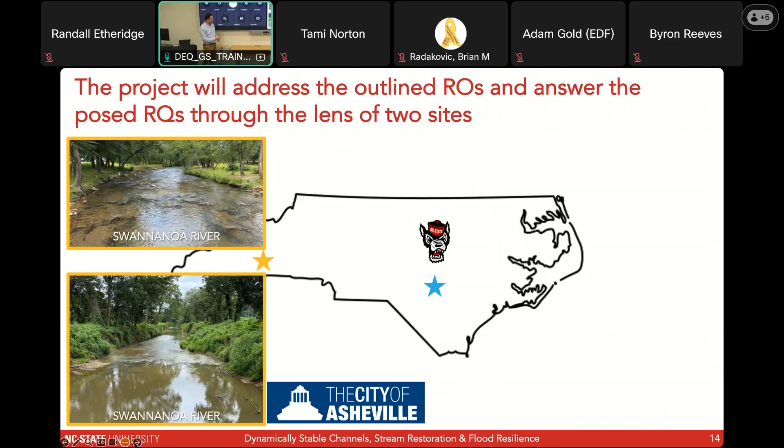And then the second site, we're hoping it will be located within the city of Fayetteville. We're actively trying to select a site. The idea is that with these two selections, we're going to capture conditions that are very different: mountain streams that are steeper and coarser in their material, with streams at the coast that are more frequently subjected to large events and that are likely going to be finer and move differently.

So at these sites, we're going to start conducting field measurements by the end of the year, and these are going to be repeated measurements. We're going to be characterizing channel cross-section, streambank erodibility, installing a fiber optic distributed temperature sensing device that will allow us to understand not only the elevations in the channel bed, but the material gradation towards the bottom, and conducting measurements of flow velocity with an ADCP.

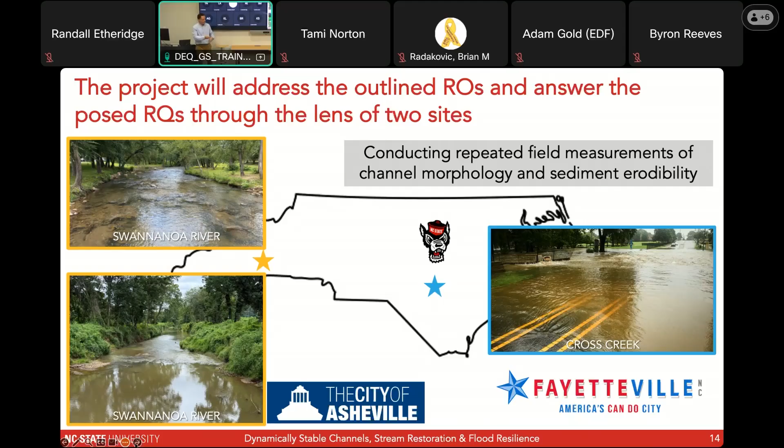So we're going to generate, in addition to the project, a good amount of data that can hopefully serve anybody outside of this who is interested in using it. So that was a very quick overview. Again, this is a lot of promises in a sense of what we're going to do, but we're excited about tackling this difficult problem, and most importantly, to contribute to the efforts that DMS is doing.